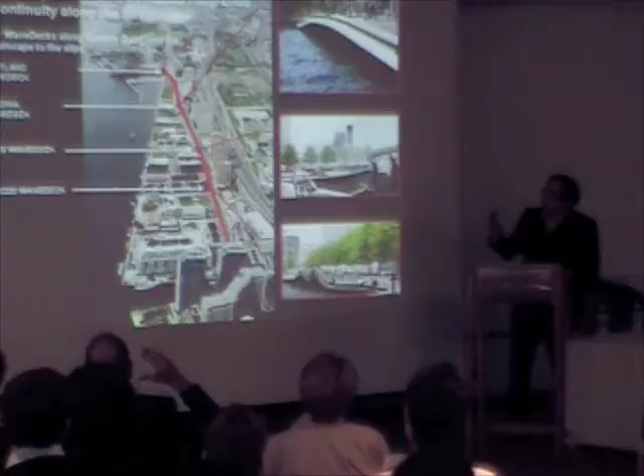Pedestrian space for bicycles and walkers and people with strollers along the heads of the slips. So it started with a little problem where the mayor was getting a lot of complaints from local residents. Then Chris Glaisek at the Toronto Waterfront proposed an international competition, and everyone said, why would you do that? It's so bad. And he asked me, and I said, I think it's the greatest idea you've ever come up with. So they did the competition, and I still believe it's one of the strongest ideas because it's trying to rethink the hardest part of the entire waterfront.

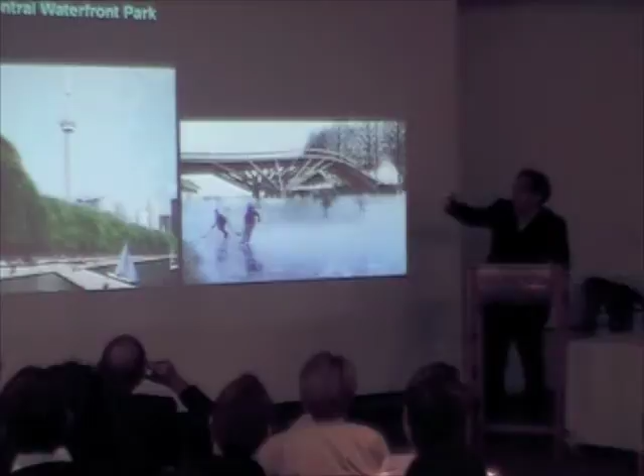So these are the bridges - a series of linking bridges out there at the ends of the quays. And these are the incredible images they proposed. Only a European could make those trees - they must be 90 feet high. I'm sure they were tongue-in-cheek, because it masks out some of the ugliest architecture in the world.

And then this is the Spadina Bridge, but they really got into the language of timber and industrial construction. Then, rethinking Queens Quay, very important - that's the south side, so a double row of trees, narrowing the lanes down, slowing down traffic, public transit.

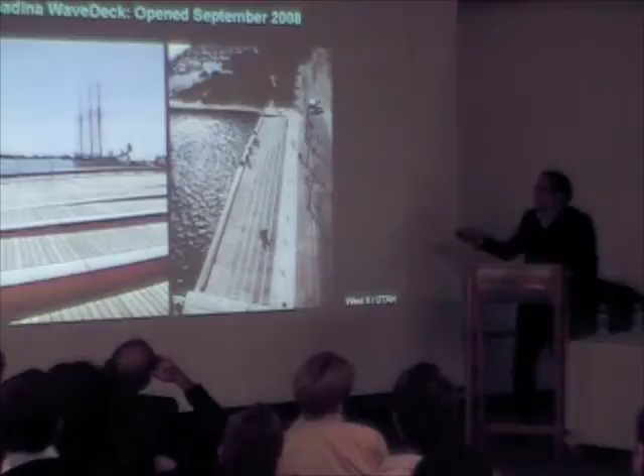And then they actually built it, and they came to design review, and guess what the issues were? Safety, slope analysis, where do you need guardrails? And here are these guys from Rotterdam - if you had railings around the canals of Amsterdam, it wouldn't be Amsterdam. Every year I think 20 cars go into the drink. People get drunk, but I don't think anyone dies.

But this is absolutely fabulous, I think, because it does what the mayor asked for, which is to increase the real estate at the heads of the slips by building over water. And I've never seen landscape architects so tectonically focused in terms of how to make things - really beautiful piece of construction.

This is it here, and they have red lights underneath. But they're doing more, because they have to do more - you have to build more. So this is Rees - there's a different sort of typology of these kind of wave decks. And then, of course, they're starting to get crazier, so here you start to see railings show up at Simcoe.

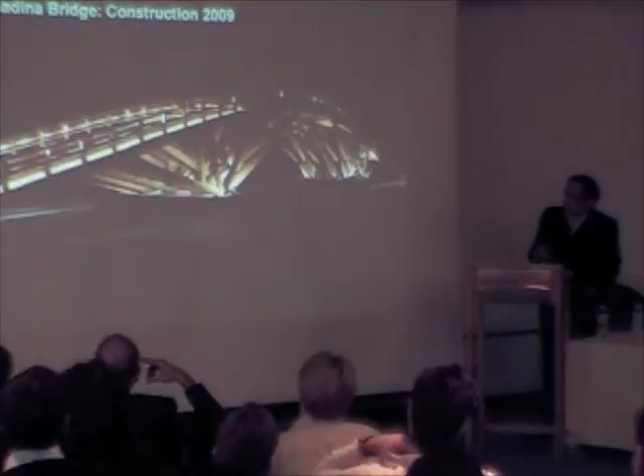But these are all ready to go now - this is now ready to start construction. The first bridge now is going forward, with a very beautiful rendering.

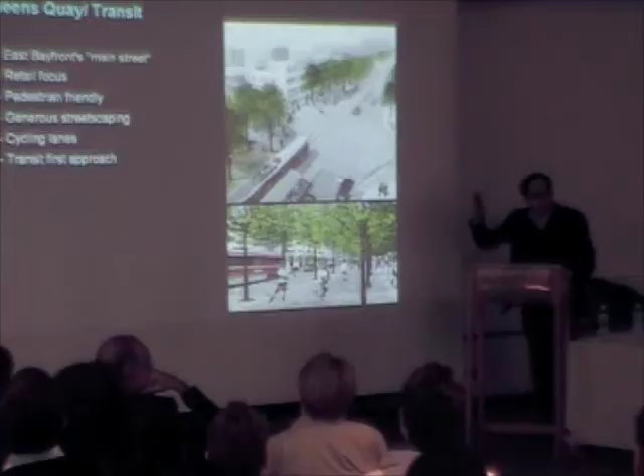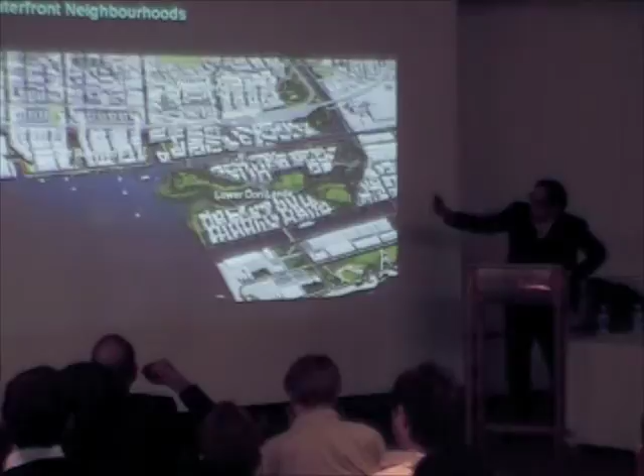Queens Quay transit orientation - think of Queens Quay as one of those green lines on the big grid that we started with. And then the precinct plans leading to what Ken will present, but there are three: one is the West Donlands, this little park here in the elbow of the Bayview is Don River Park, which is Michael Van Valkenburgh's project. And then the East Bayfront, which is front row and center, and the Lower Donlands.

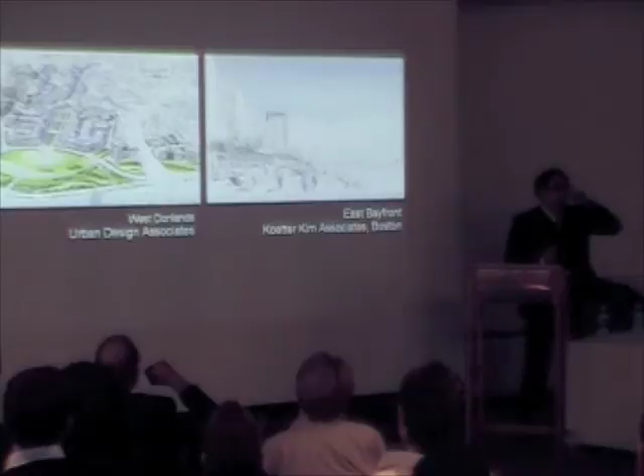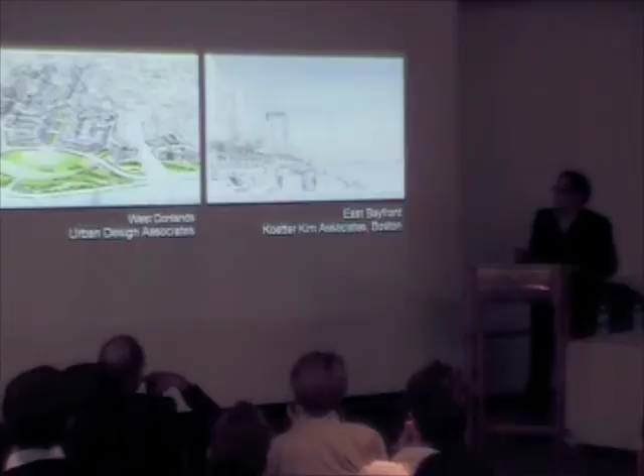It's interesting to me that they were both master planned by Americans - Urban Design Associates from Pittsburgh, Koetter Kim, he wrote the book pretty much. He and Colin wrote it, but they're basically streets and blocks plans, and we inherited them - we didn't do them, we just said okay, that's what we're working with. But it's interesting the language of architecture in relationship to the urban plan - the one on the left being a kind of mid-rise new urbanism, and the one on the right being a kind of American rational scheme.

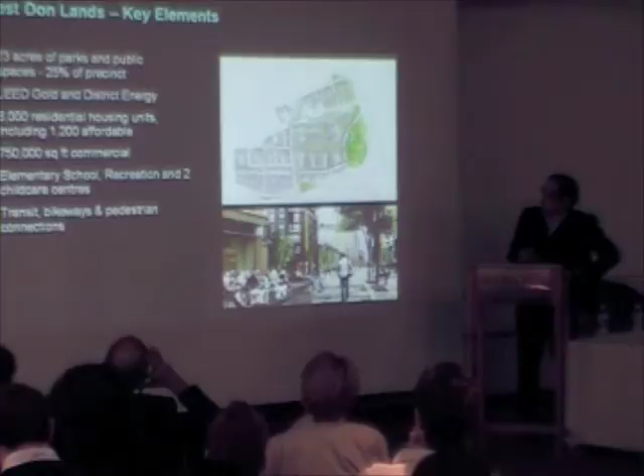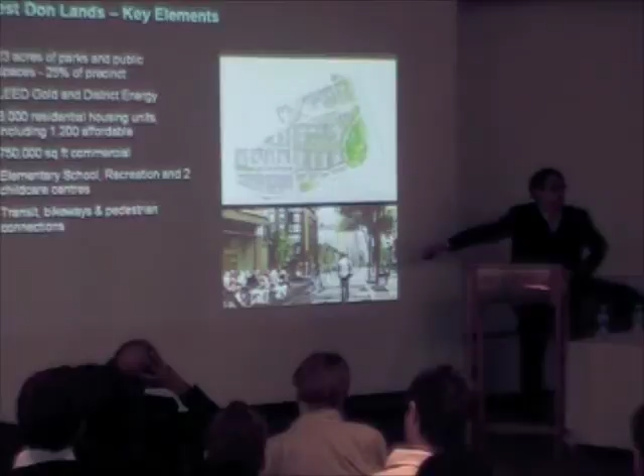But this was what Urban Design Associates showed us to be Toronto the Good. Could be anywhere - it could be Denver.

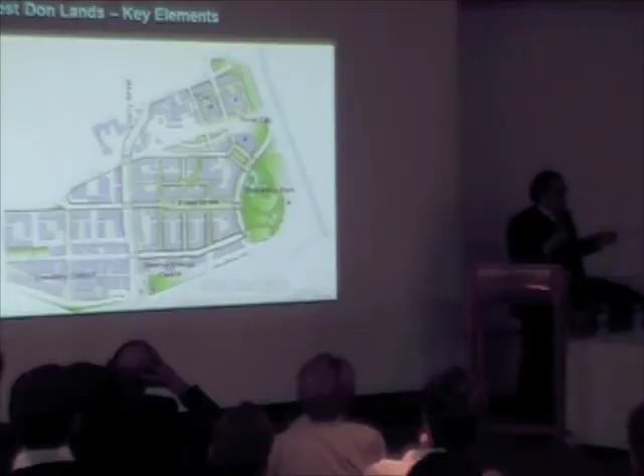These are the projects that are occurring, and I'm very excited that they are being designed by some really interesting architects. So Van Valkenburgh on Don River Park, Front Street is done by Greg Smallenberg. River City is Saucier - Gilles Saucier is designing on two sites, straddling Eastern Boulevard. TCHC is Toronto Community Housing Corporation - affordable housing, market housing, and that's Baird Sampson Neuert. And then Stephen Hall is doing the District Energy Center, which is dealing with the entire precinct, so each precinct has its own district energy plan.